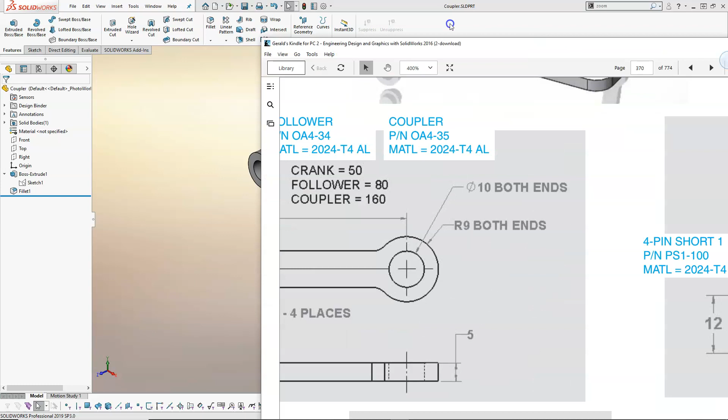Our next part, the pin, can be done as a revolve. If we drew the circles and extruded out some distance, then opened up a new sketch on the end face and made a little bit bigger circle and extruded it out some distance, we would have three separate features.

Could possibly draw the first sketch on the front plane or the top plane and extrude it the 12 millimeters in two directions, a little more complicated than what I want to do right now, and then have the last little segment. But I want to introduce the revolve.

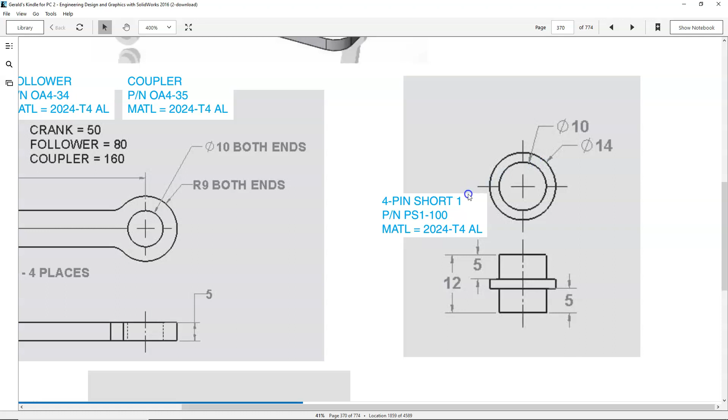And so revolve, basically, if we were to cut this in half and cut it in half again, this quarter section, we were pretty much looking at this profile around the side of the part. And then this pin, the short one, pin 1, those are 4-pin-1, 4-pin short 1. Interesting naming. Maybe we'll go 14 millimeter and 12 millimeter or something.

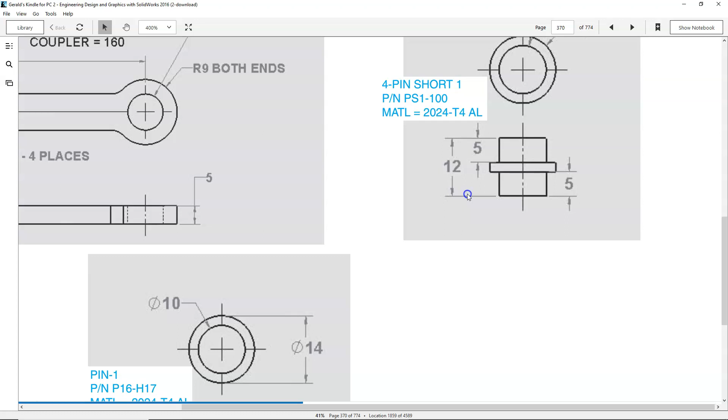Or 17 millimeter for the height, with that being the difference. All right, so we'll move those out of the way. My new sketch then, or new part, I'm going to open up a sketch on the front plane.

It is not required, but I like to just make it a habit to create a center line. And this center line is going to be infinite length and vertical. And I'm looking for it to be coincident with the origin. And so as I move close to the origin, I'm going to get that little snap, and I can see the yellow box that says it's going to be coincident.

And if I want to back out of that, I can hit OK, and we go to As Sketched and uncheck the infinite length. Occasionally it reverts and it gets a little weird, so most of the time I just hit Escape and go back into the line command fresh. So let's see what it does.

I'm going to draw that first segment. It comes out. I can see the horizontal, and then that's a little bit big based on the numbers that I'm seeing, but it will adjust in. Oh, and apparently it went back to for construction, so we're going to have to adjust that anyway.

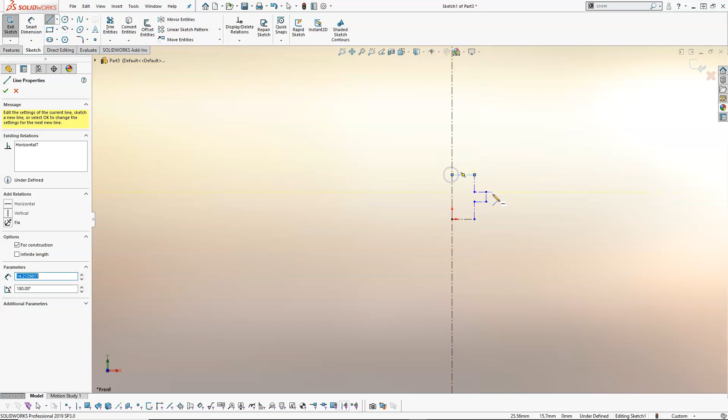So continuing on with the sketch, I'm going to go ahead and zoom up on it. So I ended up with all construction lines, even though I unchecked it. Alright, so my selection set, if I go from left to right, will be everything inside of the box. And I can see all of those lines that I sketched. If I go right to left, it'll be everything crossing the box, so including the center line.

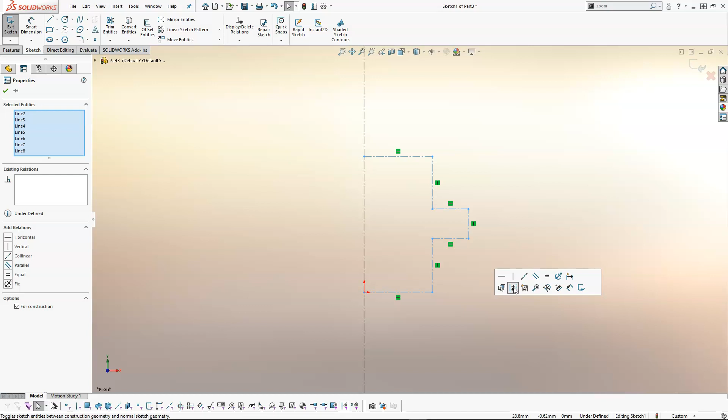So I want to take all of these construction lines and turn them into object lines. So I'm going to toggle with construction geometry or go over to the left and uncheck for construction. Both do the same thing. Alright, so now I have my object lines.

One of the rules with the revolve, if I don't include it in the sketch, is that it will ask to close that revolve. Otherwise it wants to make a thin feature, same as it does for the extrude. So if I go ahead and close it off and I have one center line, that center line will be the axis of revolution automatically. I can have multiple center lines for the creation of the sketch, but then I'm going to pick.

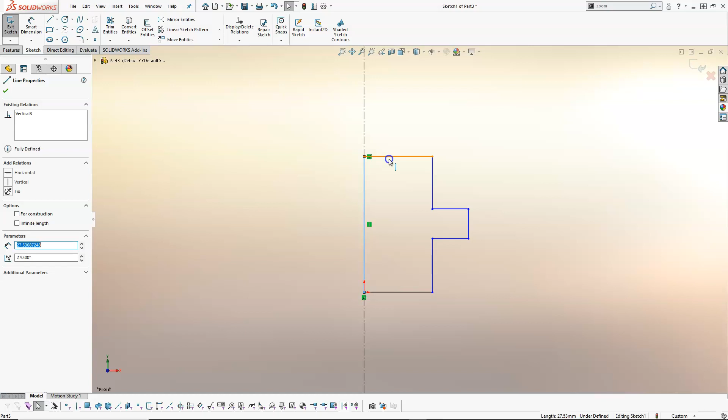If I don't have any center line, then I'm going to pick the object that I want it to revolve around, which, as long as it does not produce self-intersecting geometry, this would be valid, this would be valid, and this object line would be valid. Anything else would cause this geometry to overlap, to intersect itself, and that would cause it to error.

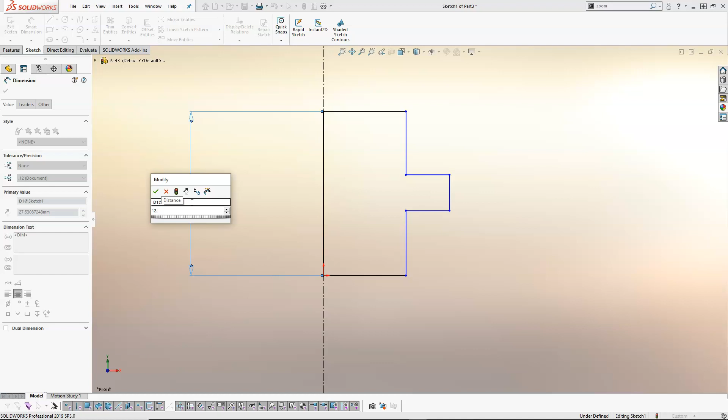Alright, so smart dimension, we have an overall height of 12 millimeters, and because of the sketch scaling, we shouldn't see anything really drastic in the change in the sketch. And we have the lower portion 5 millimeters, and the upper portion 5 millimeters.

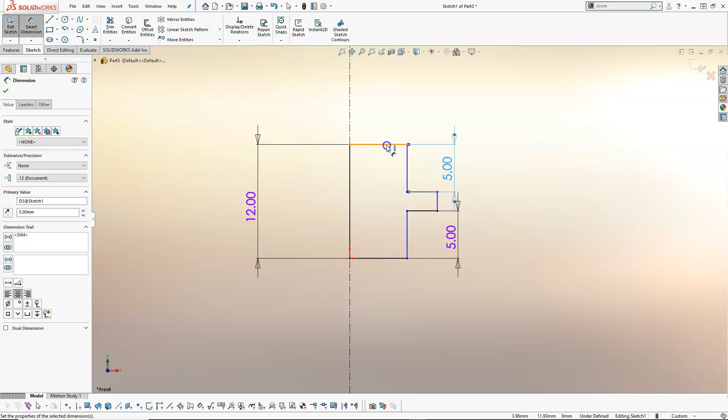Alright, so we can either take our diameters and divide them by 2, in which case I would pick the object, but we also have a diametral dimension. And that is going to also be a function of the center line. If I don't have a center line, then we have to divide and come up with the radius.

Alright, but if I have a center line, I can pick the center line and I can pick my object, and that's going to give me the radial dimension. As long as I'm between the center line and the object, it will be radial. As soon as I go to the other side, it shifts to a diametral dimension, and now we can put in 10 millimeters.

And then, since I am in that diametral dimension, when I pick my next object, it should automatically jump and go back to diametral as well. So 14 millimeters for the diameter. And the choice is looking into my magic crystal ball of design intent, that remaining blue line.

At some point is the base or the crank follower coupler going to change size? If I think it's going to change size on any one of those parts, then I probably want to leave that boss independent. If they're always going to be the same size, so I go from 10 millimeters to 12 millimeters, it's going to go to 12 millimeters on all parts, then I would want to do something like make it collinear. Alright, so with the relations, we have, again, way too many choices.

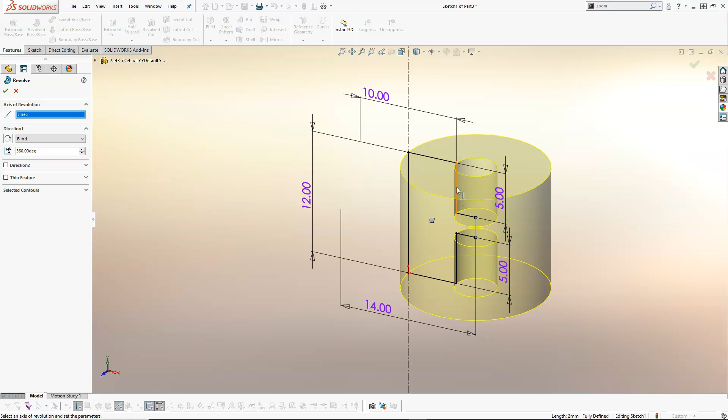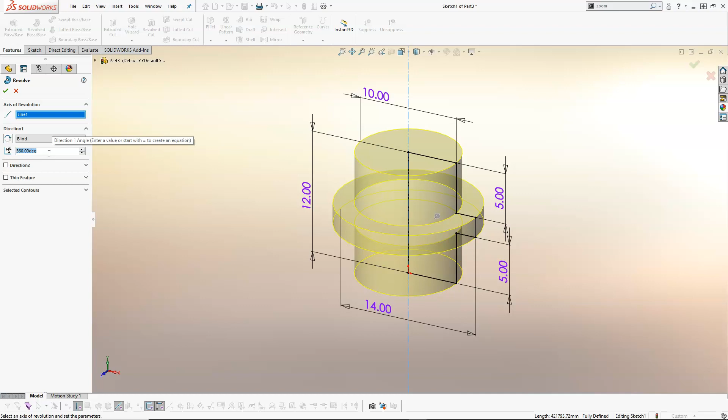So on the very outside, but the verticals, it self-intersects. I don't think it's going to like that one. And the lower one, pretty much the same as what we had. And then picking the last object line gives us the same as the center line. But the nice thing about the center line is it will default. We can also tell it to go some portion, so 180 degrees would be half. But most of the time our revolves are going to be 360 degrees.

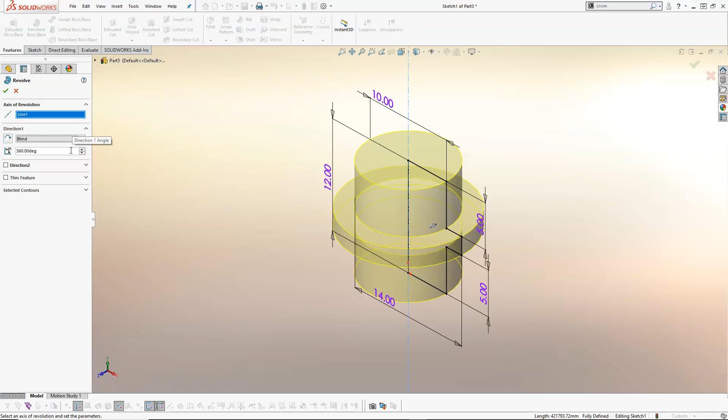And the end conditions are up to vertex, up to surface, mid-plane. We can manipulate a little bit, but we don't have that same number of selections that we get with the Boss base extrude. So that's my pin 1, pin short 1. I'm still not quite sure about the naming convention there, but we'll go with it. Maybe we'll just do pin short and pin. So that generates my first geometry. That has all of the information in it that I need to also produce the second.

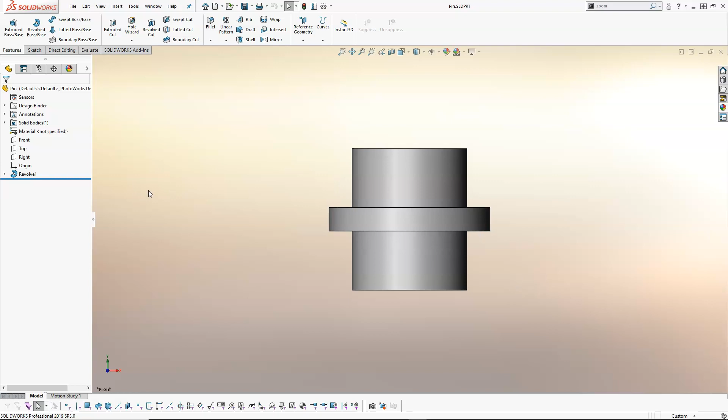So we're going to go back to File and Save As, and I'll make sure I save as Copy and Open. And I'm just going to delete the short out of that and call it pin. Alright, so we go back in, we have a choice. We can edit the sketch. I can double click on the sketch and just start changing numbers, but if I edit the sketch, I'm going to see those changes in real time. So the diameter is still 10 millimeters. The outside diameter is still 14.

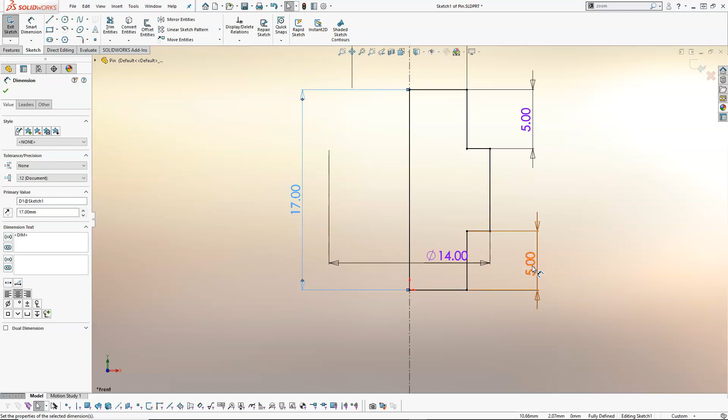The overall height becomes 17. The upper section is 5 and the lower section becomes 10. So that's pretty much what's going to engage into the base. All right, so double check my numbers: 5, 17, and 10. 14 for the diameter, 10 for the smaller diameter. All right, so we go ahead and we accept.

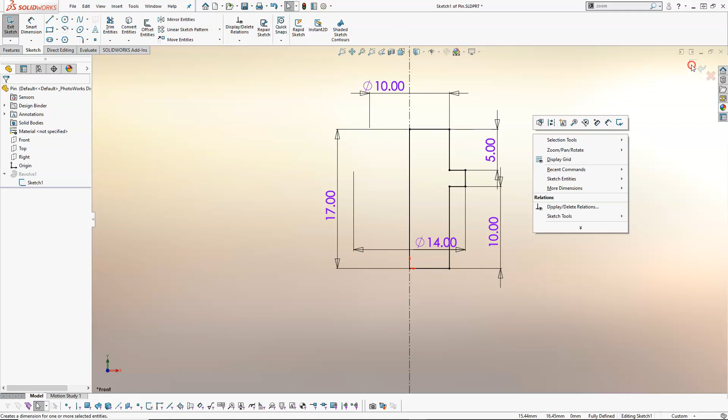So I can either come up to the confirmation corner. That's probably my preference. If we right click, we have the exit sketch. And if I come over and exit sketch or I rebuild, all of those do the same thing. So I'm going to accept the sketch through the confirmation corner, and then we'll just save. All right, so that gives us our pin and creates the parts that we need to build this assembly.